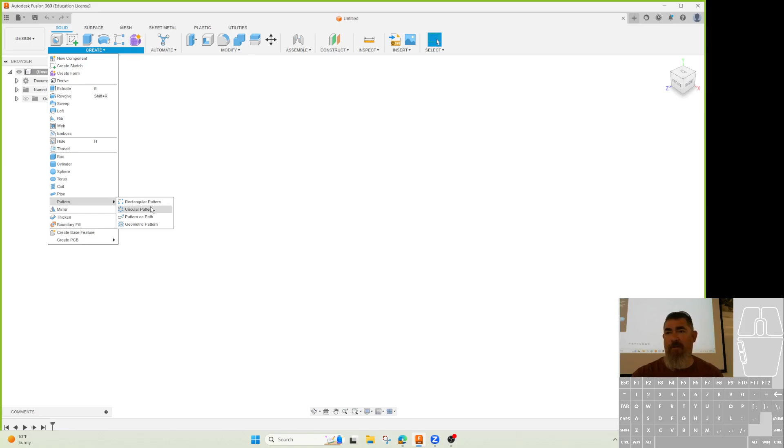So if we go to create, I come down to the bottom, there's mirror here, and then there's pattern. There's rectangular, circular, which are the more common ones. There's also pattern on a path, so you can follow a weird shape or something.

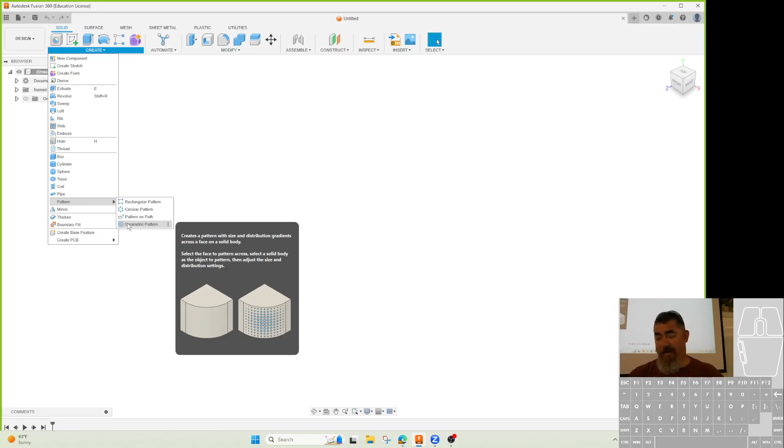And then this geometric pattern, which I actually used on this SD card holder reader, except it didn't work quite the way I wanted it to. Because even though I had told it the exact size of this square, when I patterned it, it wanted to scale it up and down because it wants to make more of an aesthetic kind of thing, and it's not tied to a specific size. So it didn't work quite the way I wanted it to. But if you're doing a grill or something like that, it's a good option to use.

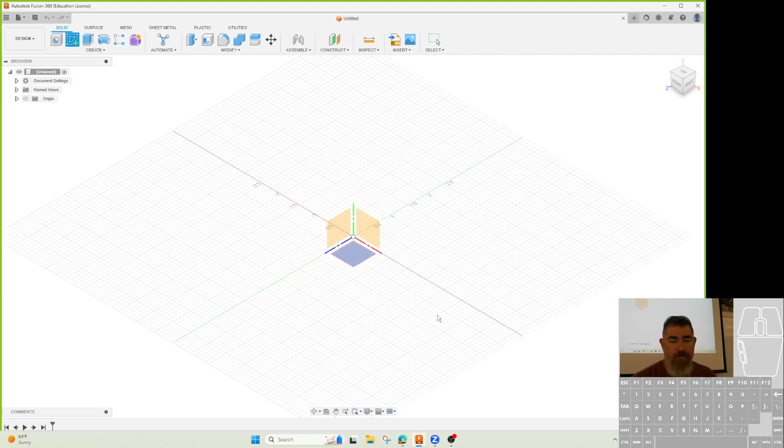So let me create something real quick. So if you're drawing things that are symmetric, what does symmetric mean? Same on both sides, right? So anything that's, this is symmetric, this is symmetric, right? Something's symmetric in more directions than others.

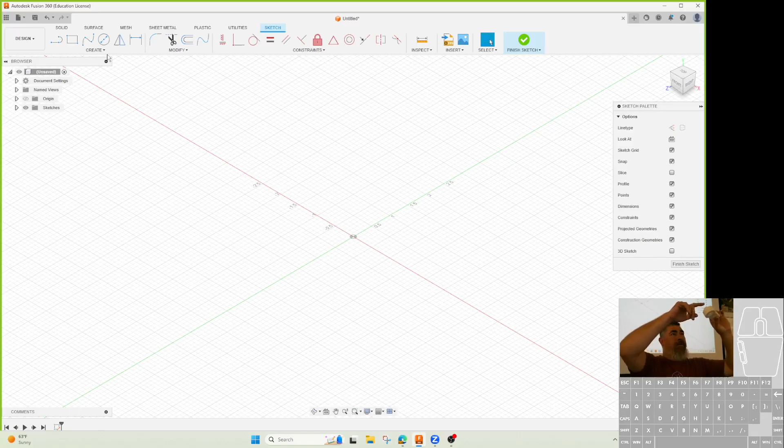But if you have a part that's got some symmetry to it, the best thing to do is create it where the planes are going down the middle already. So if the plane's already in the middle, when you mirror - so when you were little, you did the thing where you draw half of a drawing and put a mirror against it, and by changing the angle of the mirror, you can change what you saw in it. You can get it to look like both sides were done. That's what we're doing. We're drawing half of it and flipping it over.

But in this case, we're not necessarily doing it in the sketch. We're doing it after we do something with it. So we're going to draw it, extrude it, and mirror that whole feature over to the other side. Or we can draw half the part and mirror that half to the other side. So I'll show you both of those.

So let's say I'm going to start here. If I want to draw a feature on this side and mirror it to the other side, I should probably start with a center rectangle, right? Get started with the half planes in the middle, so that way I can mirror across those planes. And I can tell this to be however big I want it to be.

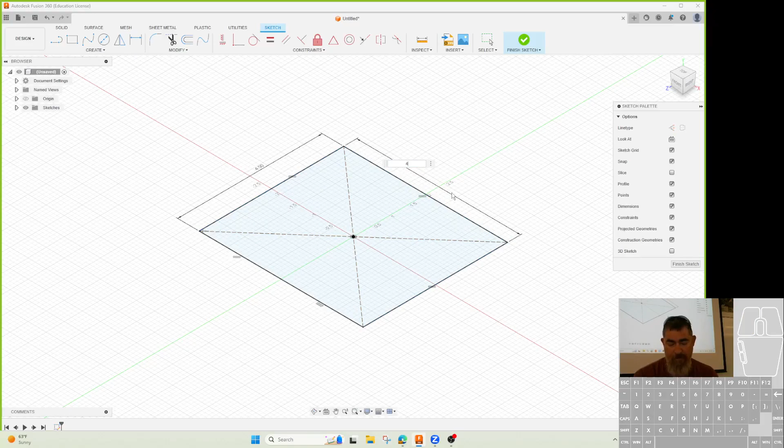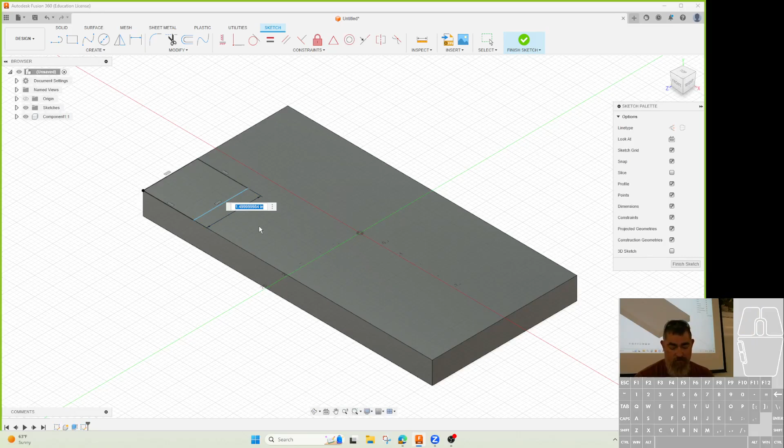Extrude it. New component. Cool. So now if I go in and do something on this side, let's say I want to cut off that corner. I cut that corner out, but I want that same cut to be on this side.

I'm just going to go to create, mirror. In this case, I'm going to tell it, what is that cut? Is that a body, a face, a feature, or a component? Feature - it's a feature, right? So I'm going to pick that. But I can mirror any of these things.

This face one sounds appealing - it's like, oh, I'm just going to mirror this face. It's the hardest one to use. I'd recommend using features.

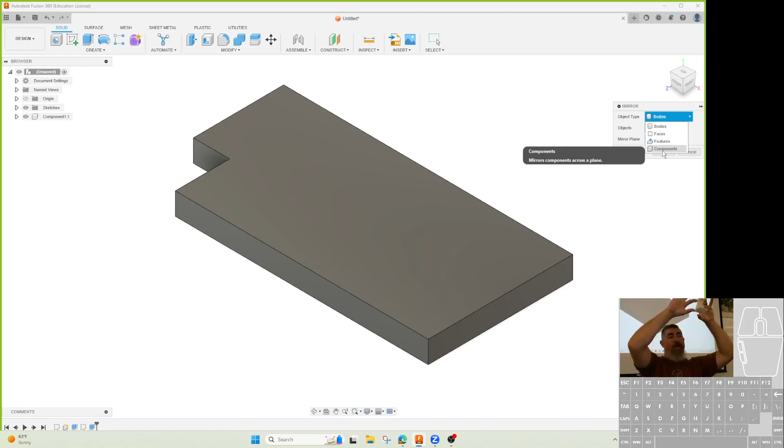So features, bodies, or components. Bodies - if you draw the first half and want to flip it over, bodies is a good option. Features - if you've already drawn the whole part and just want to mirror some stuff across. And components - if you've got a finished part and you want a right-hand version and a left-hand version, a complete opposite version of it. Like I want one of these, but instead of these things being on the left side, I want them on this side. I want the whole thing flipped, so I want two different versions of it. I can mirror the component when it's done to get that.

The object I'm going to mirror, I could pick it here on the model. That's not always the easiest way though, because you might pick the wrong feature or something. I always pick it off the timeline, because then I know exactly what I'm picking. Especially if I need to pick multiple things, I can go down the timeline, pick them all, and it's really easy.

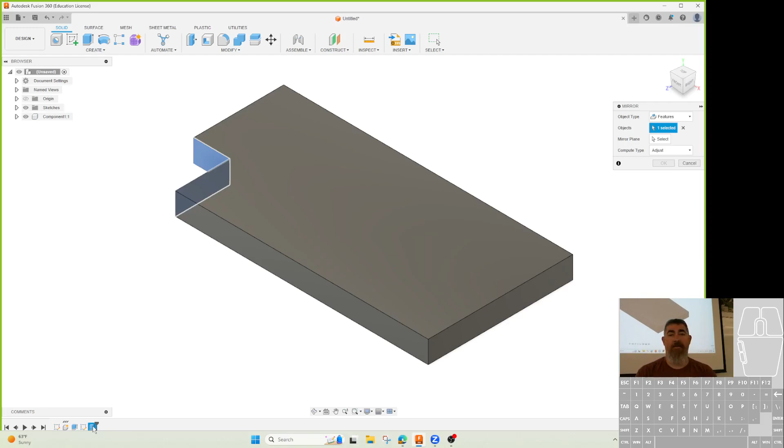Then I go to mirror plane, pick the plane in the middle, and it flips it across, and I can say OK.

Easy, right? So let's say I want to add some more stuff to this mirror. I'm just going to go back in time - remember the timeline here, I can go back in time before I did that, and add some other stuff.

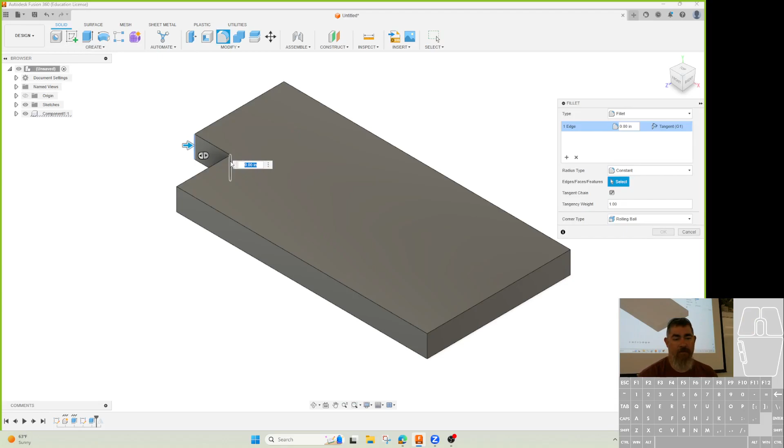So let's say I'm going to add some fillets, then go after that. Uh-oh, what happened? You have to select the other feature - I have to do that feature.

So now, objects, I'm just going to pick, hold control, pick the fillets too, and say OK. Uh-oh.

Hey, how are you doing? It's a little lagging up. All right, so you can see that one corner didn't come.

This is one of the things that happens with mirror a lot - if you're mirroring a feature and that feature isn't fully made by the other stuff that you're mirroring, sometimes the fillets work, like up here it worked, but down here it didn't.

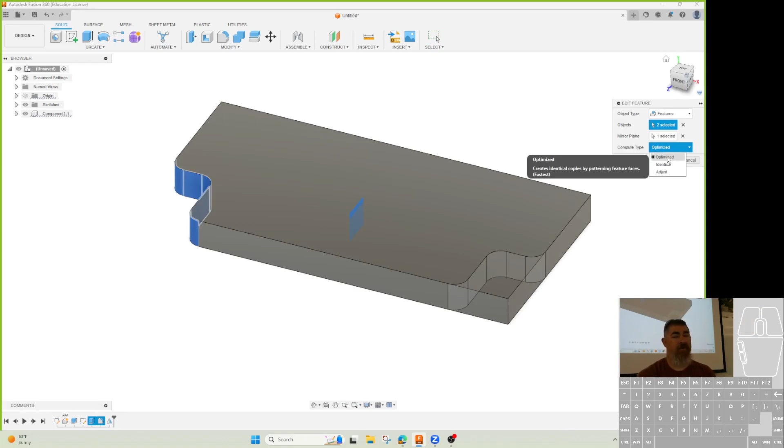If we go in and change this to be identical, that still didn't work. Optimized - sometimes changing that, oh there you go, now it works. So sometimes you have to pick kind of how it's doing the math to mirror that over, because sometimes optimized will bring stuff over, but sometimes identical just works better.

So if you mirror and it doesn't come across the way you want it to, try one of the other three options, or the other two options.

Because sometimes that'll work. One thing I'll also do, especially in other programs like SolidWorks that doesn't have those options, is I'll mirror the cut and maybe this fillet, but then I'll do these two fillets, or those 4 fillets later. Because I know that those, since they're not part of the thing being mirrored, not fully contained, it's probably not going to work. So I just won't do that until after the mirror.

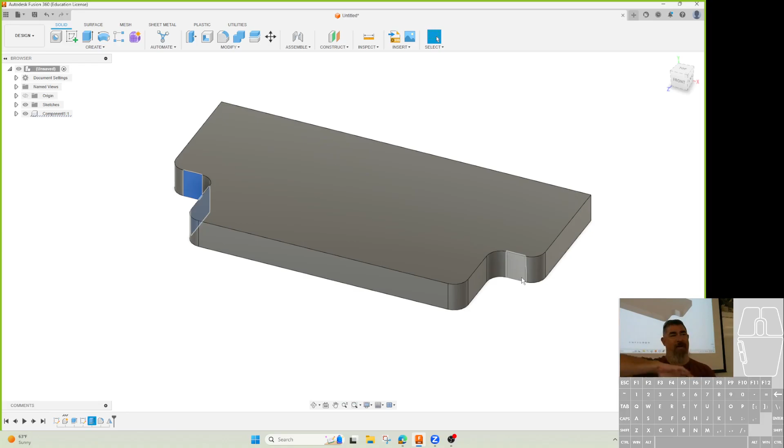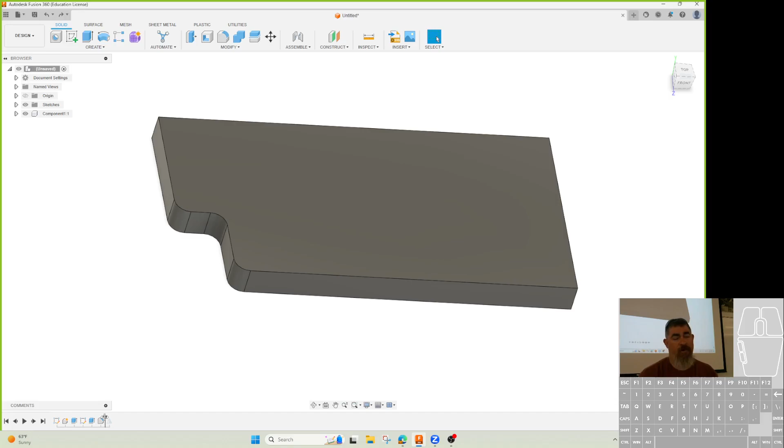Does that make sense? So that's just one thing to watch out for when you're doing that. Let's see, what else - so that's mirror. I can also mirror, like I said, half the part.

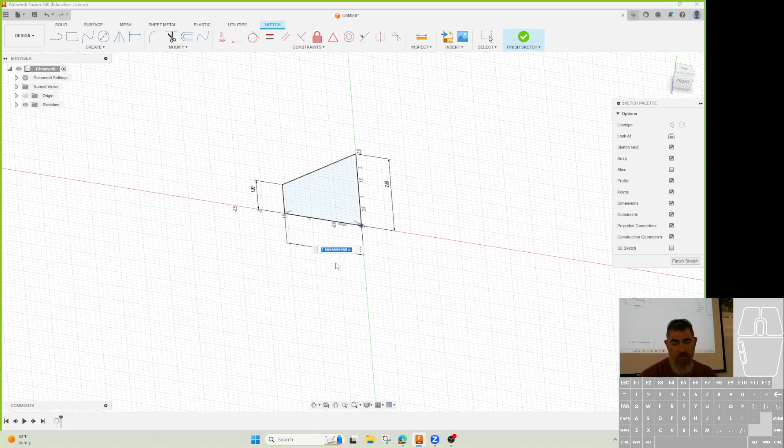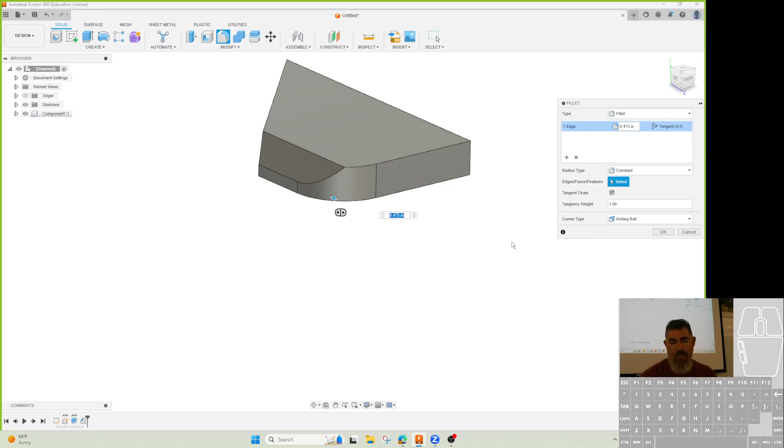So let's say maybe I've done this, and I want to mirror that. And I've done some work on this half of it - I've done a chamfer here, a fillet there, whatever. So I've got this thing and I've got a bunch of stuff on it.

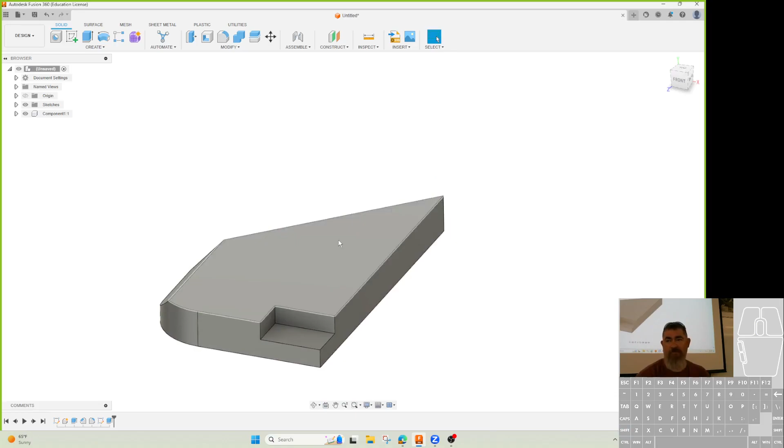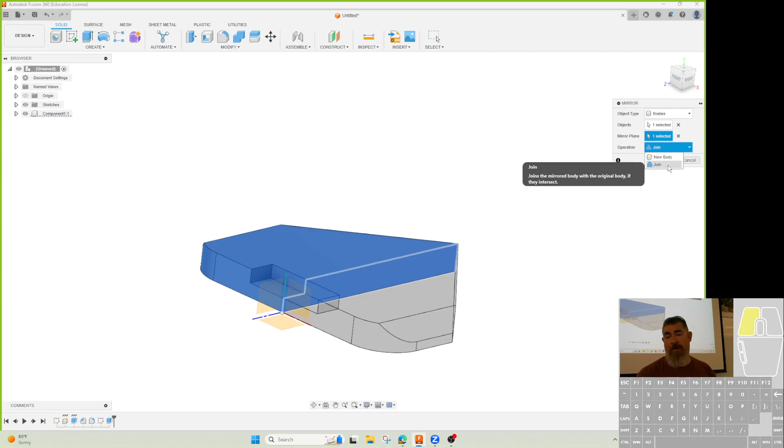And this is my whole half of it that I've done. I can come in here and tell it mirror - I'm going to tell it body, so the object is going to be that whole body, and the mirror plane, pick there. And then I can tell it either to make a new one, so I have a left and right body of this, or I can tell it, better yet, to join it. Now I say join, and now it's all together.

I've got the whole thing. And now, of course, I could say, oh, now I want to fill out this here, I need to add anything centered on the part, whatever. So those are the kind of two options for mirror. Pretty easy, right?

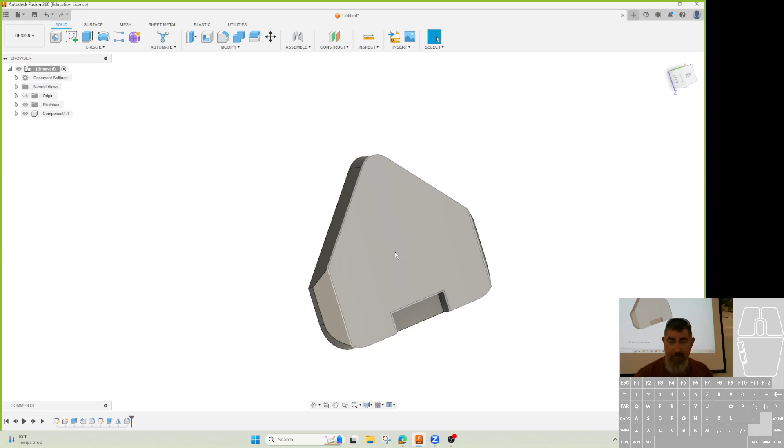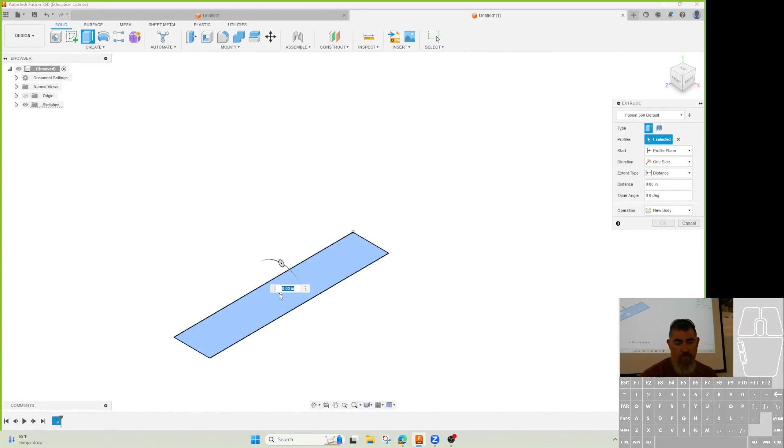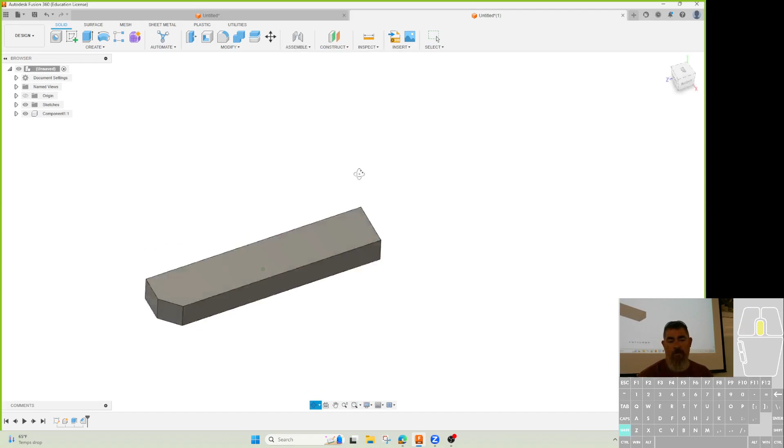You can do things in mirror like if you've got - you need it to be 2 different directions, going on here, and I want the same piece going this way. I can go in, I can create - if I want it to be like with this chamfer facing up, I can do a circular pattern to it. But if I want the chamfer facing in, so if I want... well, you have to create a different plane for it to mirror off of.

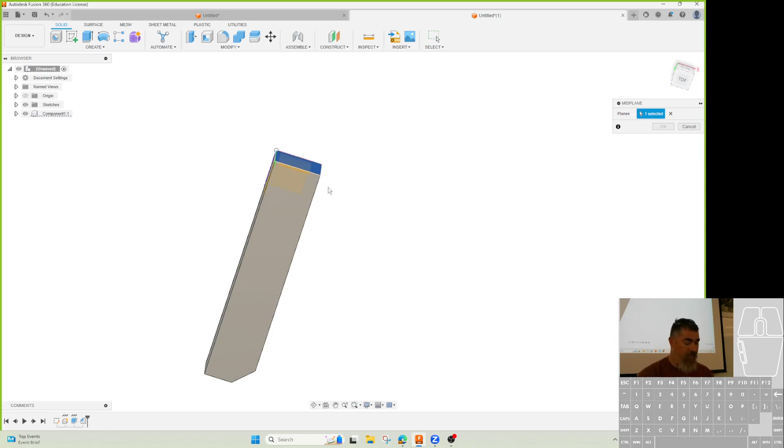Yeah, so then I can create a plane at 45 - I'm just going to do a midpoint plane, right? Pick that plane and that plane, and now I get a plane going across the middle. And now I can go in and mirror that piece across that plane. Now I get that.

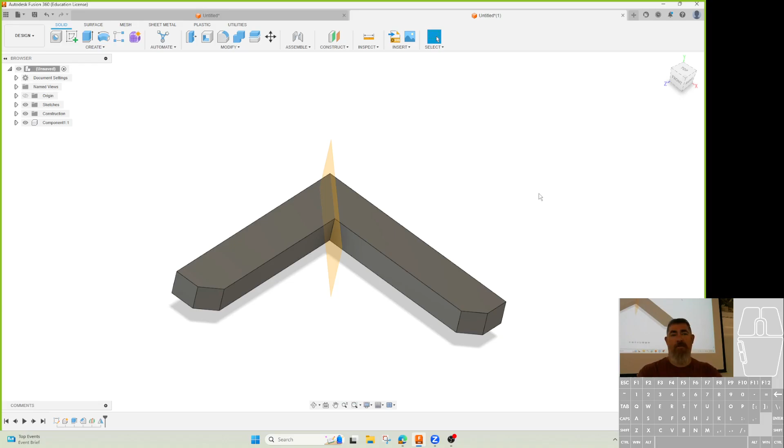Okay, so that's an easy thing to do also. Does that make sense? That's kind of the other good part of mirrors. If I need to go 45s, and even if it's like I need holes spaced here, but all the same holes on this side, I can do the same thing - do the holes, do mirror, and now they're equal spaced in that corner. So, any questions on that?

All right. Nope, that one. So, like I've been promising, we're going to do this one finally.

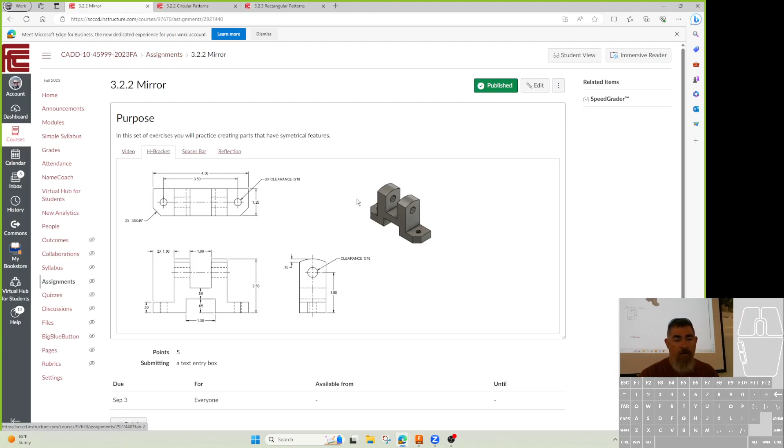And so, I did call out clearance holes. I don't care if you use the normal clearance - I think I set these all up for the normal clearance. That's usually the one you want to use unless it says otherwise. So just do the normal clearance. Look and see where the dimensions are.

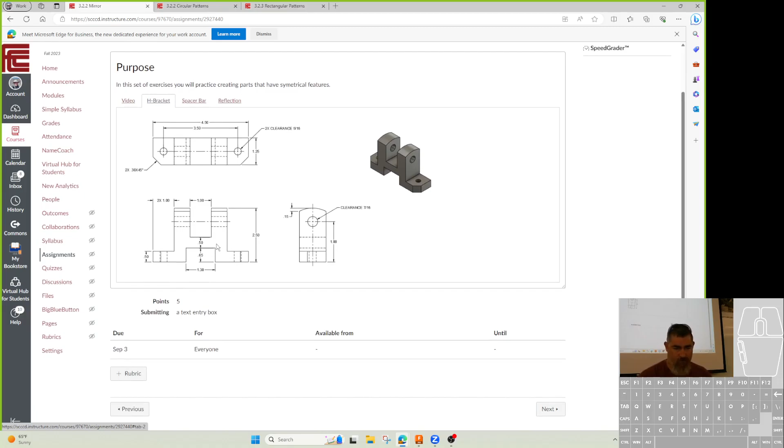Over here, should I do this cut first or this cut first? The top cut or the bottom cut? Bottom. So the bottom is the one that's dimensioned. Oh, no, yes, the bottom. You have to do the bottom one first, because you have to do the bottom to define this line, and the top one comes from that line, right? So don't do the math, just do this one first.

And then that way you can just put in that half-inch dimension. Make sense? So that's part of the intent of the drawing. And I haven't dimensioned it like from here because I want this dimension. I want this 1 inch gap in the middle. I want the half-inch down here. I want the 1 inch from outside. So use the dimensions I give you.

Don't say, oh, it's 4.5 minus this, and do the math for how wide this piece is. Don't do that, because if I say, okay, now change the part where the overall is 6, and the space right here is 1.5, I want you to be able to adjust those things and have it move the correct way. Does that make sense?

These holes right here, see the center line extends out past the part. So in this direction, the center line stays inside the part - that's saying that it's just where it is. But this way, the center line goes all the way up past the part. That's showing that those features are centered on the part.

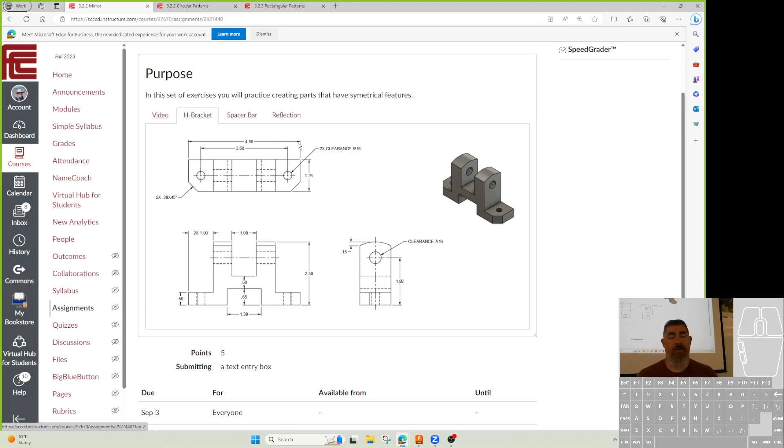So any other questions? Yes, no? All right.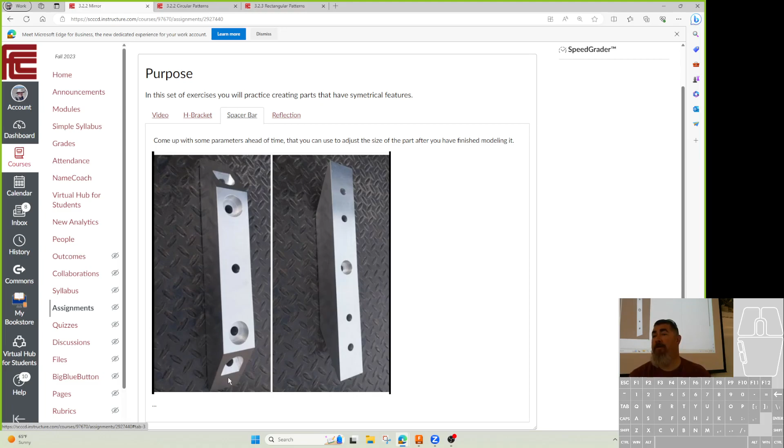So length, height, depth. And is it square or not? If we know it's square, that's easy, but if we're not sure, maybe we want both the height and the depth. And then set up the distance between the holes here and the distance from the hole to the edge. This one is probably centered on the part, so we can just use that for the constraint.

I was thinking inner hole to inner hole, outer hole to outer hole, because they're going to be mirrored. From this distance here - it's probably these two holes that are related. It could be outer to outer, inner to inner, or this one and outer, or this one and inner, whatever you want to do. Since we don't know, we're just guessing, but yeah, some kind of dimension for the hole spacing this way.

And on this one, what do you think - draw half and mirror it, or draw the whole thing? I'll probably draw half and mirror features, or mirror the whole body, and then just put this one hole in at the end. That's probably what I'd draw, from here that way. So I'd draw it out, put in the holes, put in the chamfer, mirror it, put in this hole from the bottom. That's probably the steps I would take, but try it different ways and see what works.

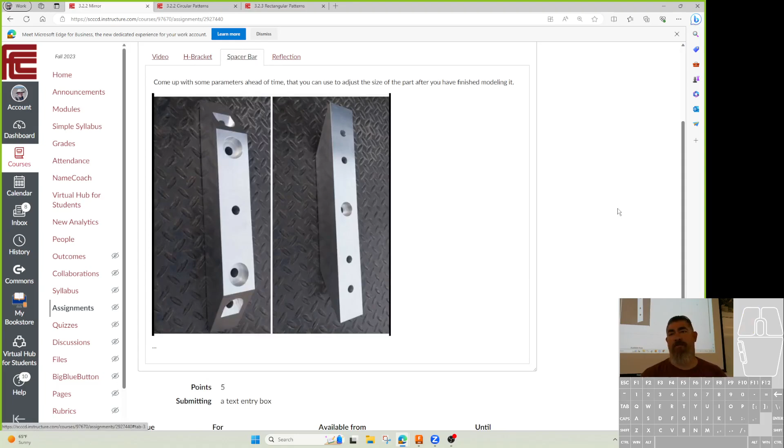I'm not going to give you the correct numbers for this because I want to see what you guys come up with. So any questions on that? That's the two things for mirror. No questions? All right, then we are going to stop here. I'm going to let you go.